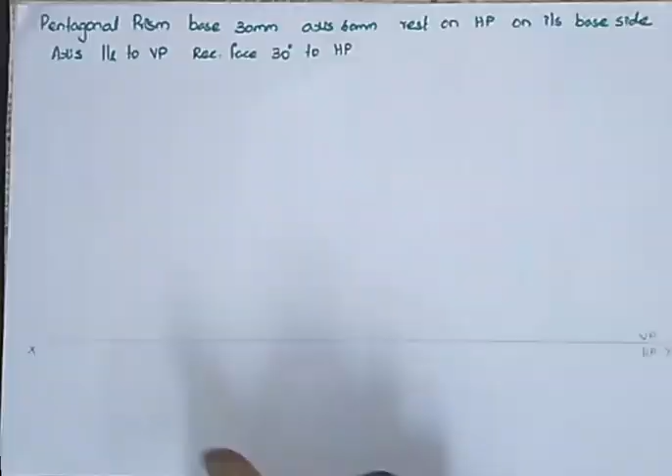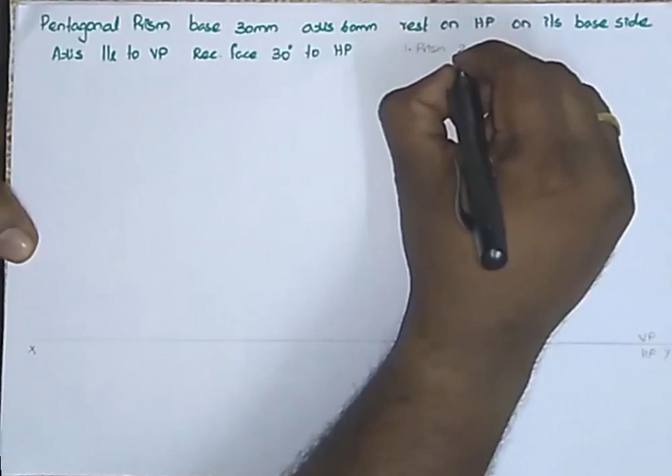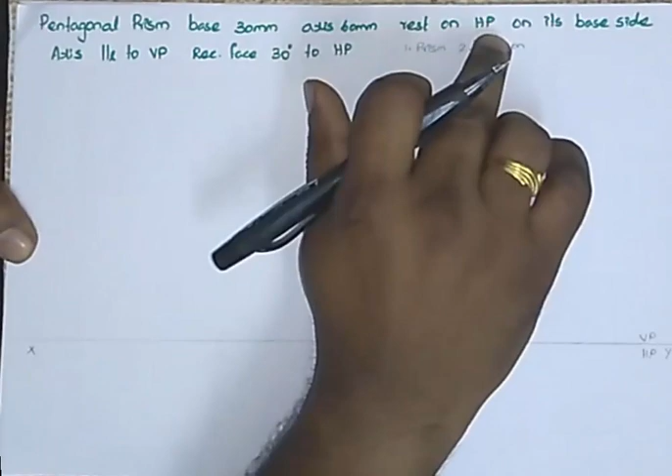So in the problem, it is given that it is a pentagonal prism. So the first thing you have to look at, it is a prism. The second thing, it is a pentagonal prism. Third thing, you have to look at the resting point. Resting on HP on its base side, so it is given as side resting.

Third one, side resting. And the fourth point, the axis is parallel to VP, so that the axis is perpendicular to HP. So the axis given is parallel to VP, so I am taking axis is perpendicular to HP. And also I have to mention another point: the rectangular face and the longer edges and the axis are parallel to each other.

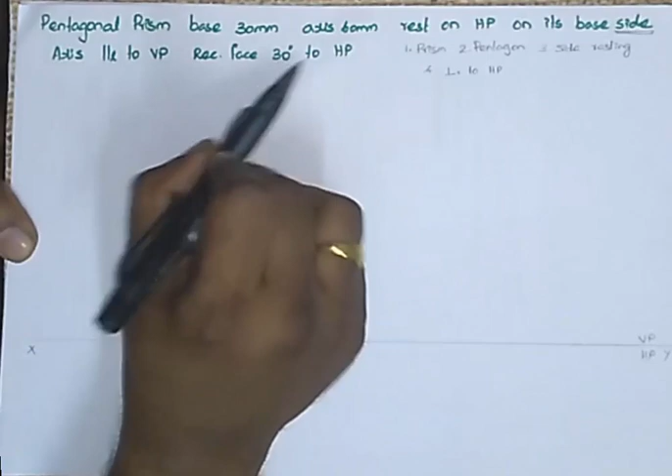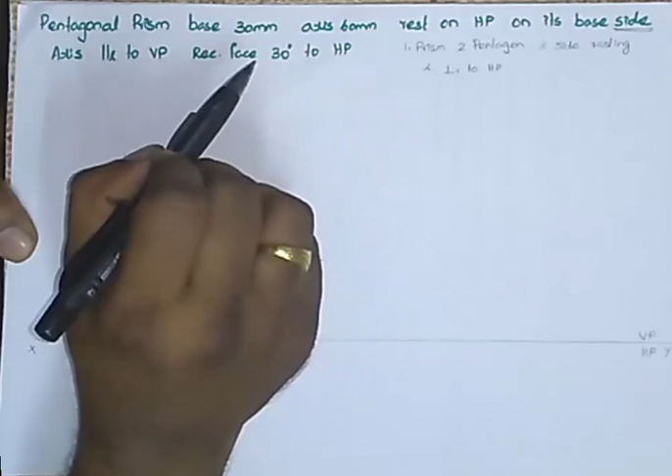So once the axis makes an angle of 30 degree to HP, then automatically the rectangular face makes an angle 30 degree, and also the longer edge makes an angle 30 degree to the HP. So axis inclination is 30 degree. It is given as rectangular face 30 degree inclined to HP, so axis is 30 degree to HP.

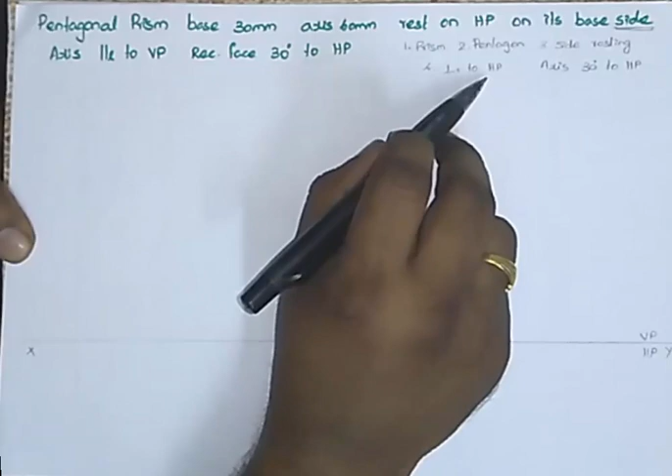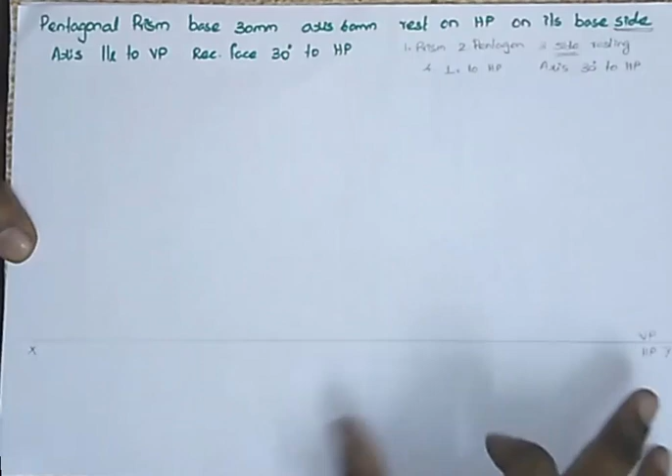Once the axis is perpendicular to HP, then in the top view only you can see the polygon. So you will draw the top view here. I will draw the polygon here with resting condition side resting. Here I have drawn the pentagon with side resting condition. The next thing, I have to number the system. As I told you, the top side of the polygon will have A, B, C, D corners, and the bottom side corners will have 1, 2, 3, 4.

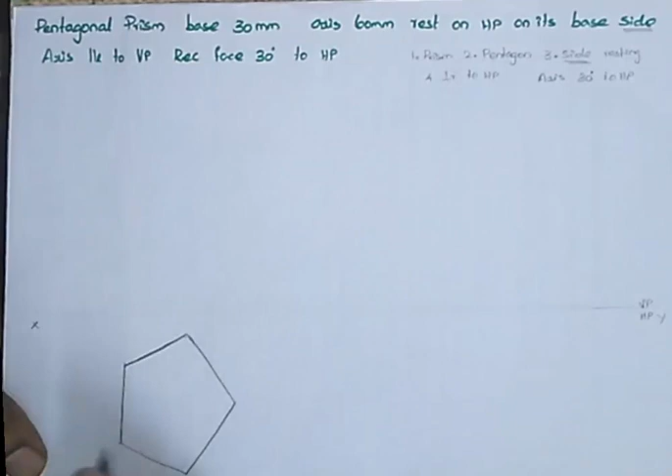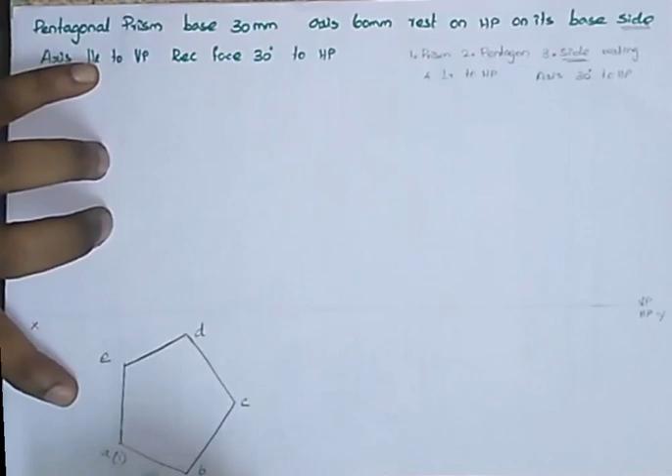When you view from the top, this top side polygon point will be visible. So I am keeping point A here, point B, point C, point D, point E. Since these bottom polygon points are not visible, I am keeping the points within the bracket. Point 3, this is point 4, this is point 5. Once I number the system, I have to project all these points to the top.

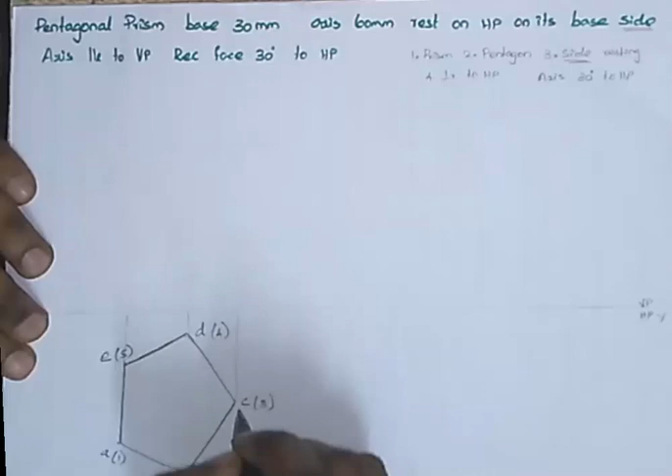So in the front view, you can see only the rectangle, with the height of 60 mm, that is axis height of 60 mm. So I am drawing a rectangle in the front view, that is on the top side of the XY line. So like this, I have drawn the rectangle for the front view with dimension 60 mm. This dimension is 30 mm.

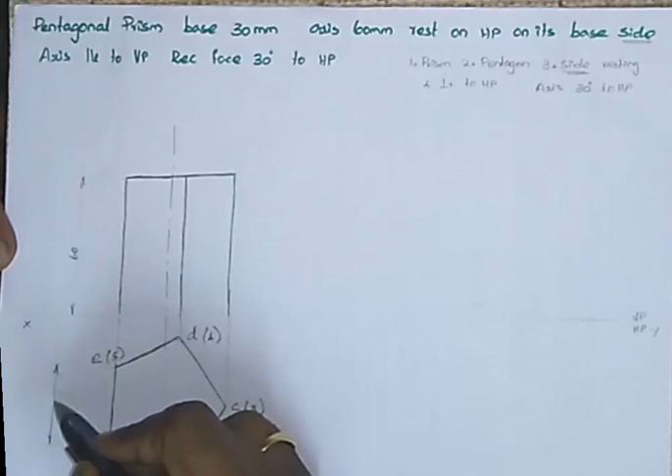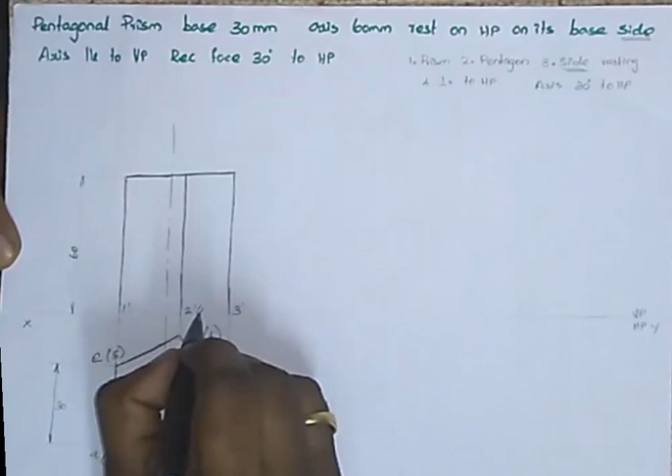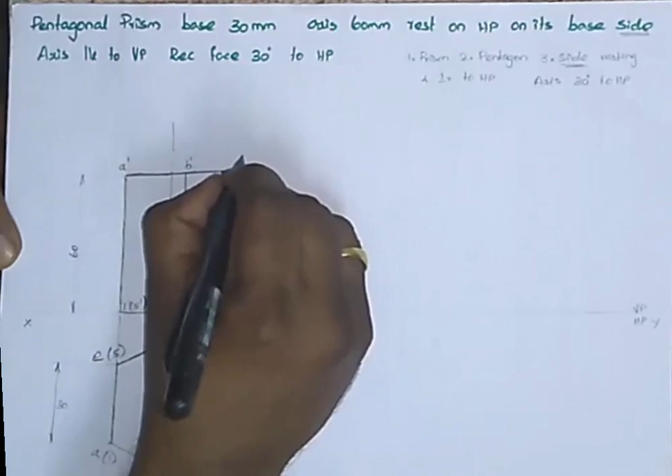So now I have to number all these corners. This bottom corner will have 1, 2, 3, 4, 5. So this is 1 dash, this is 2 dash, this is 3 dash, this is 4 dash, and this is 5 dash. Similarly, in the top you will have A dash, B dash, C dash, D dash, E dash. So the simple positioning is over.

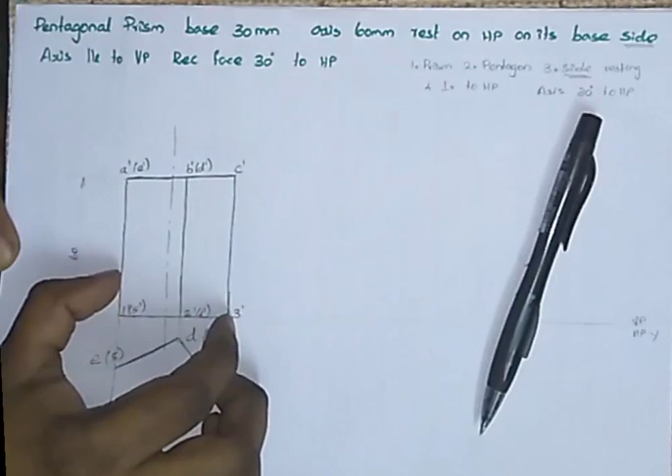Next thing, you have to tilt this axis to 30 degree. Already in the last lecture I have explained why I tilt the axis in this direction, not in this direction. If I tilt the axis in this direction, my base will be tilted like this. Once my base is tilted like this, my resting condition will become floating condition. So I have to keep the axis like this only, since I keep the resting condition at the left side.

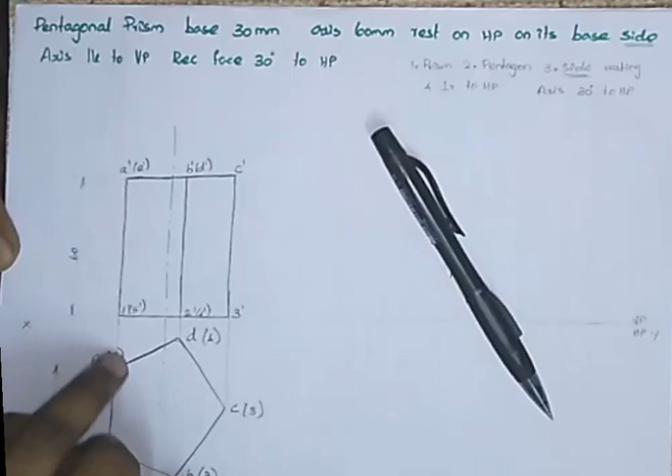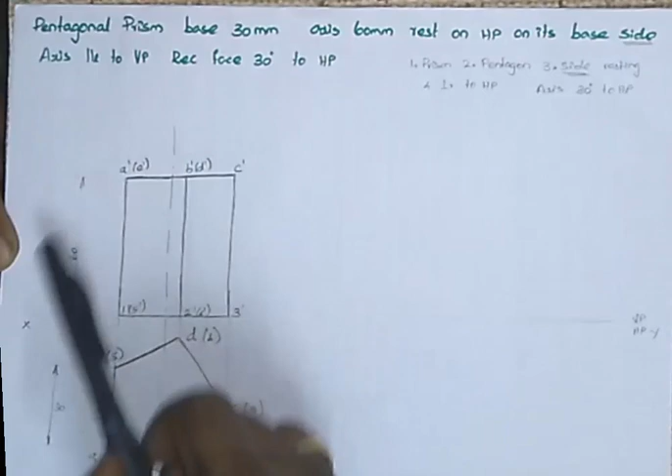So in order to tilt the axis to 30 degree, I can tilt the base to 60 degree, that is 90 minus 30, 60 degree. Once the axis makes an angle 30 degree, the base will make an angle of 60 degree, since the axis and the base are perpendicular to each other. The first thing I have to do is make a point with the name 1 dash, 5 dash.

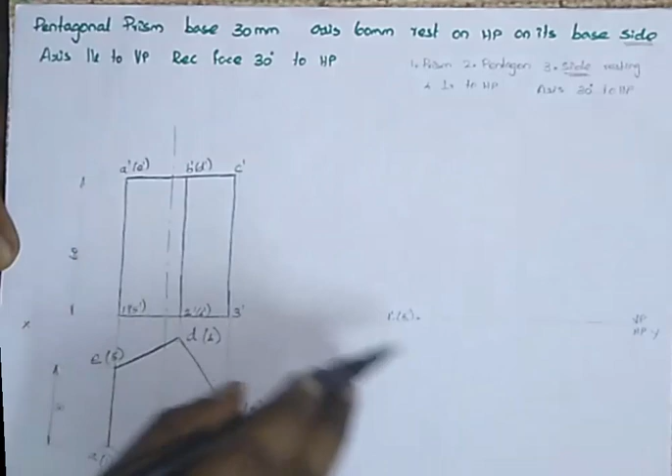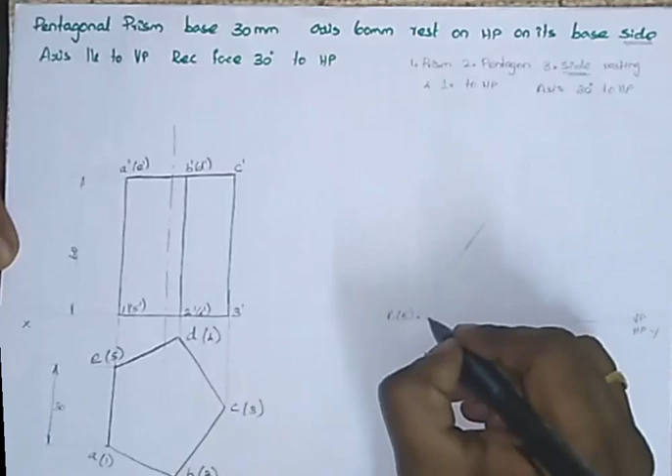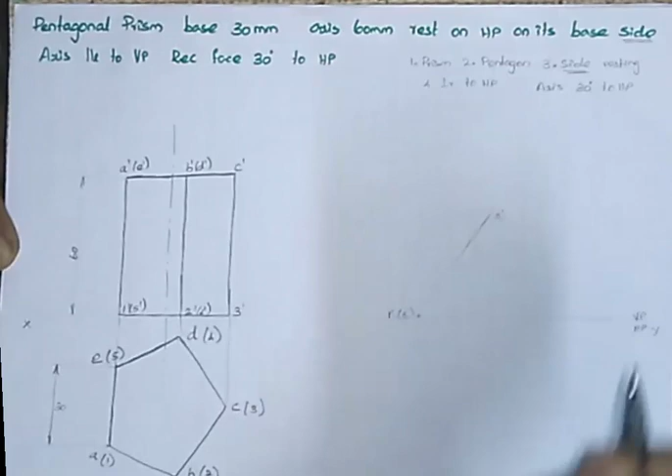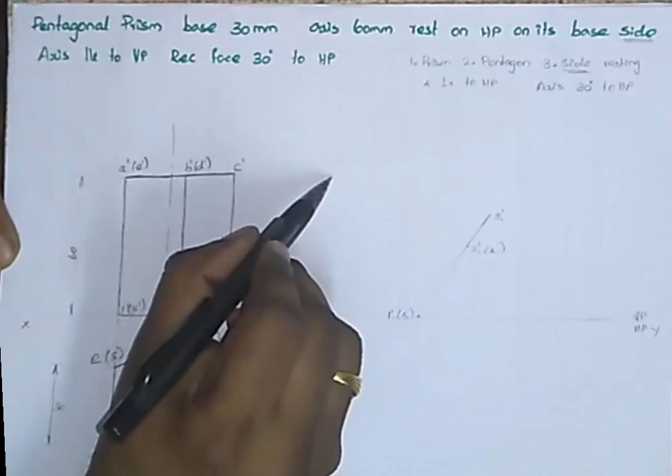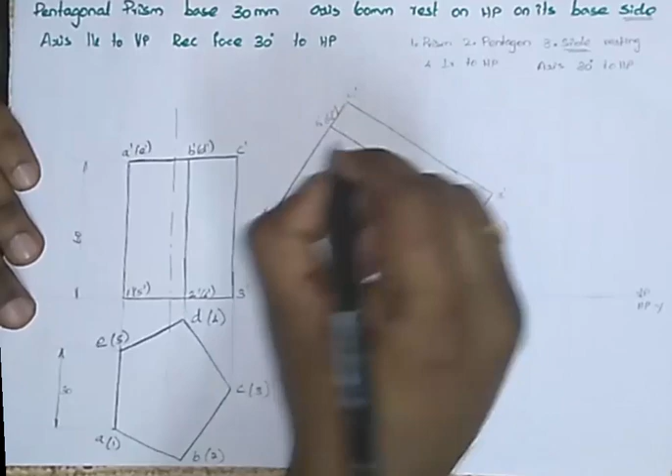From the center, draw the axis line like this. I have tilted this box to an angle of 30 degrees. So this angle will be 30 degrees. So this rectangular face makes an angle of 30 degrees with HP. So numbering: this is point A1 dash, this is B1 dash, this is C1 dash, this is D1 dash, this is E1 dash. So next thing, I have to project all the points.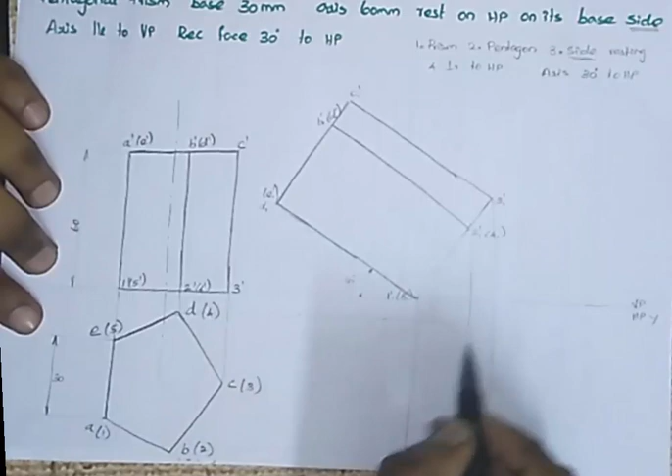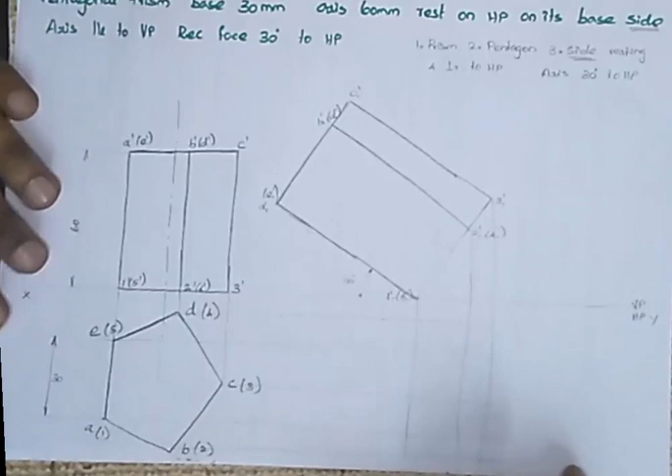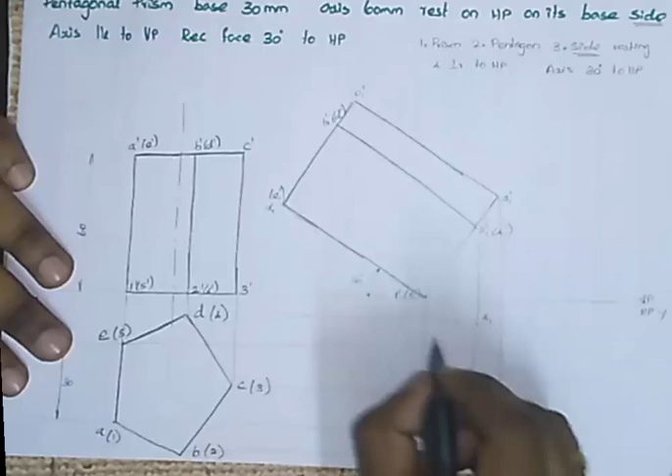So project all these points 1, 2, 3, 4, 5 to the bottom. Project all these points horizontally. Now you have to find out the points 1, 2, 3, 4, 5. So point 1 is here, it is projected like this. So this point is point 1, 1. Similarly, this point is point 2, 1. This point is point 3, 1. This point is point 4, 1. This is point 5, 1.

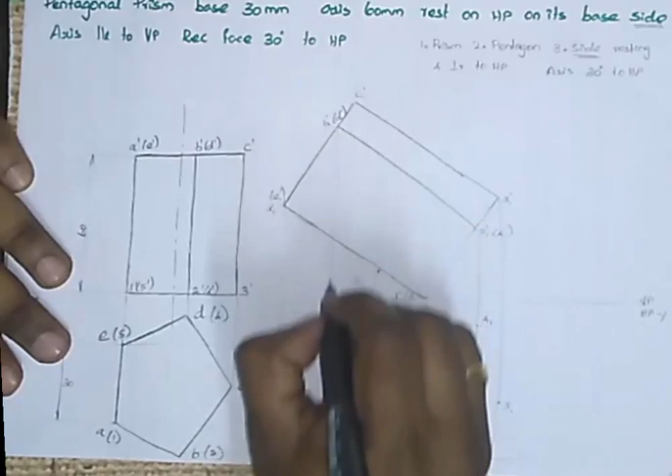Now project all these ABCD points vertically. Point A will be here, point A1. Point B will be here, point B1. This will be point C1. This will be point D1. This is point E1.

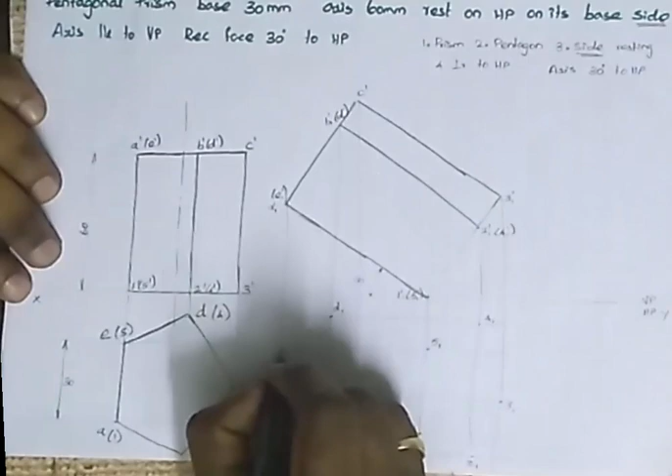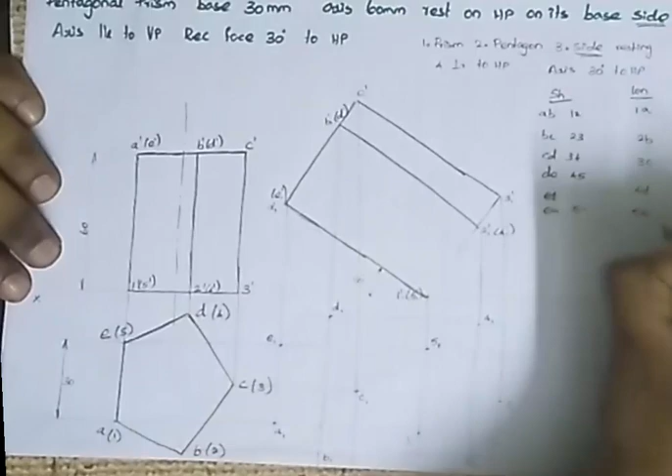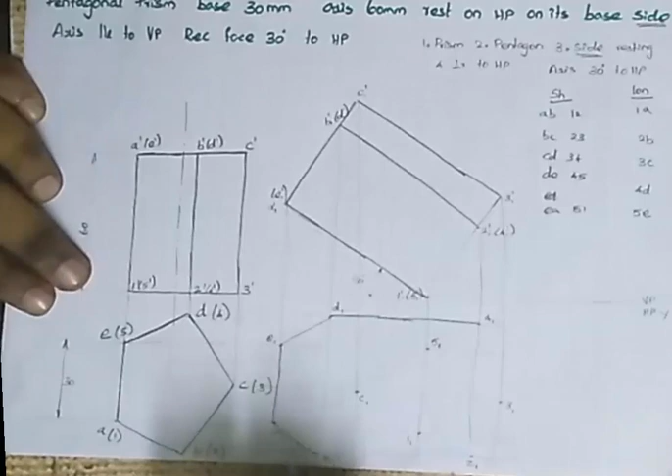Okay, now the next thing, you have to darken all the edges. I already told you the shorter edges, longer edges. Here the shorter edges are AB, BC, CD, DE, EA. And 1 2, 2 3, 3 4, 4 5, 5 1. And the longer edges are 1A, 2B, 3C, 4D, 5E. So first thing, you have to darken all the outer edges. So connect all the outer edges like this. And then darken all these outer edges.

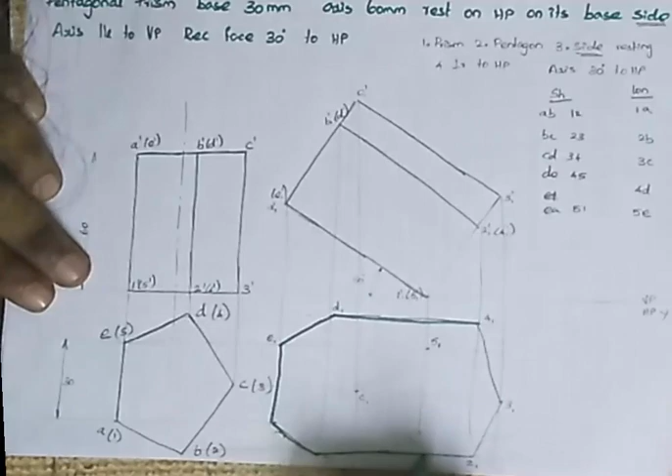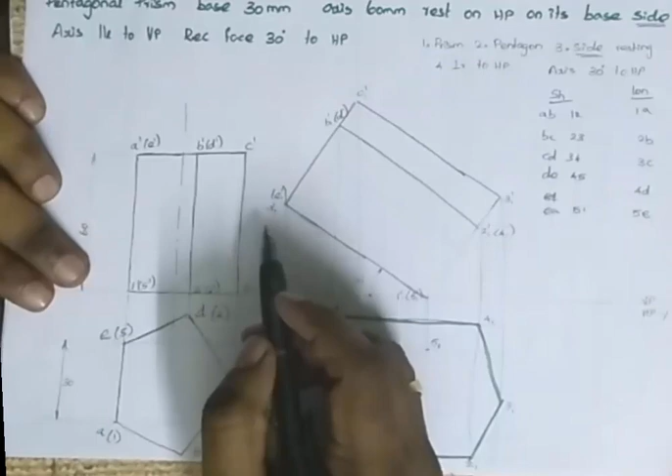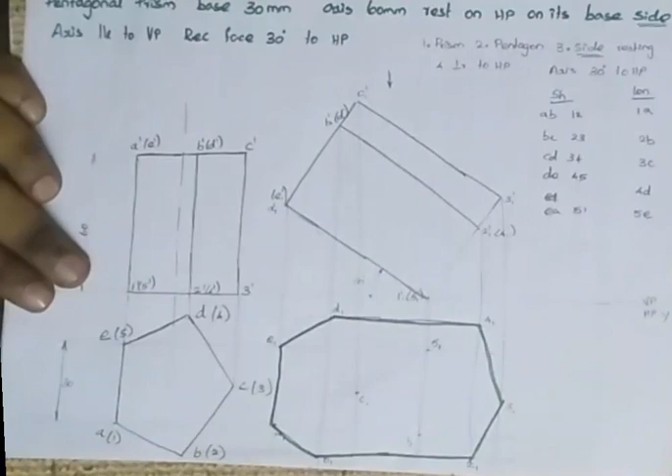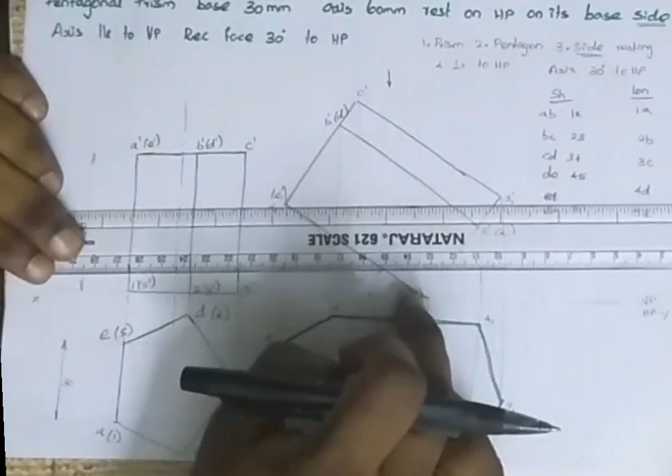Right. Second thing, you have to look at the shorter edges. I told you a method. Connect this left side point and right side point imaginary and make an arrow mark here. So the points between that arrow mark and these two points are visible edges. So this top side polygon will be completely visible. This bottom side polygon will not be visible. So the shorter edges A, B, C, D, all will be visible, and 1, 2, 3, 4, 5 are not visible. So I am making AB already.

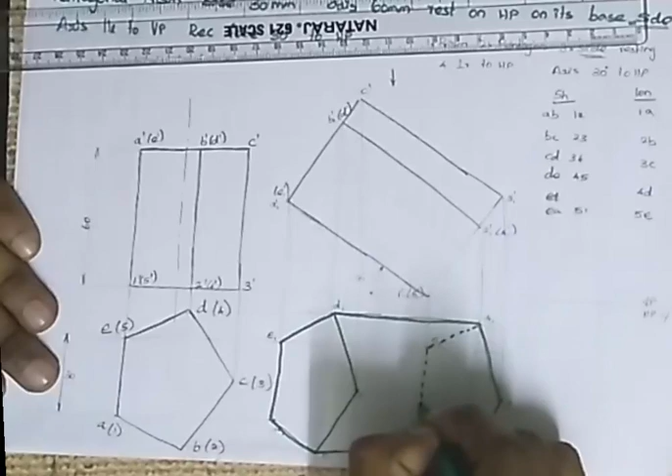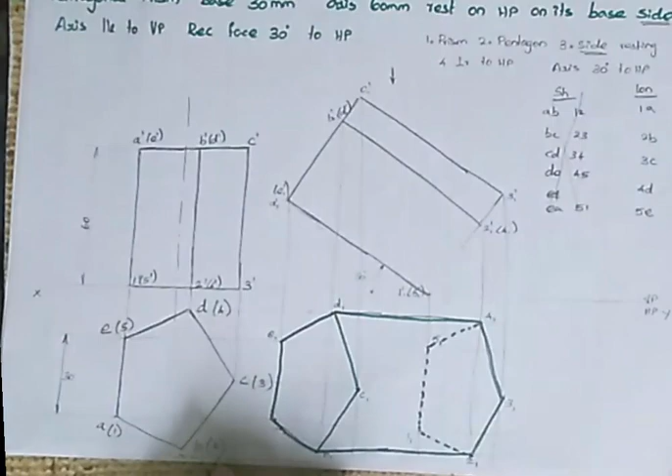So again, I am coming to that method. The only longer edge that lies between this imaginary line and this arrow mark is 3C. So 3C is the only visible edge. So I am making 3C with the HB pencil as a thicker line. All other longer edges are invisible. So 1A is here. 1A is an invisible edge. Similarly 2B. 2B is an outer edge, so it is visible. 4D is an outer edge, so it is visible. 5E is an invisible edge. That's all. We have completed the problem.